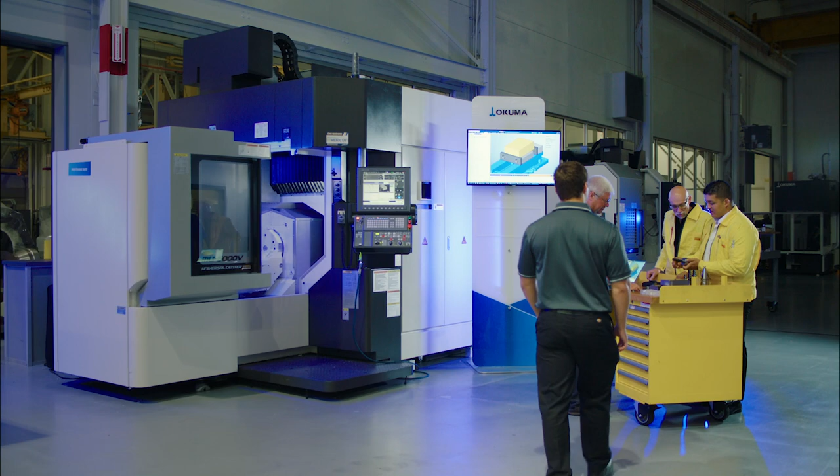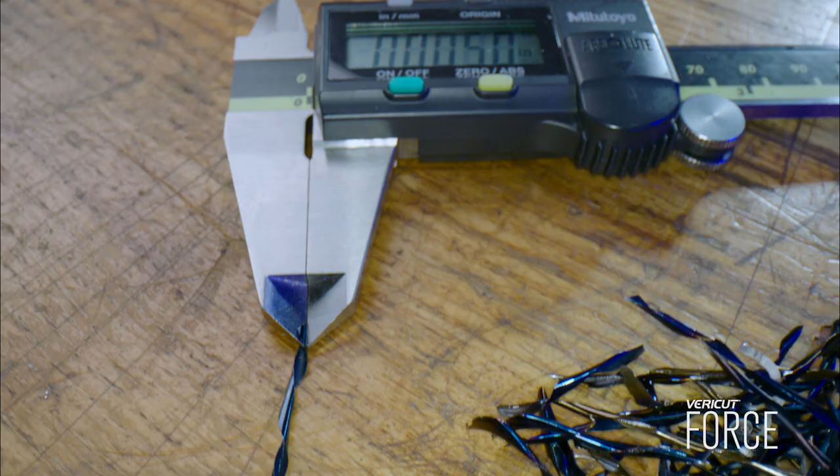Force optimization is based on machining fundamentals that have been proven since we started making parts. It changes program feed rates to keep the chip thickness as ideal and constant as possible. You get charts on chip thickness, the volume removal rates of the tools, tool deflection potential, cutting forces at the tool tip, and spindle power. All that information is available at your disposal, so you can take a look and see where your problems are.

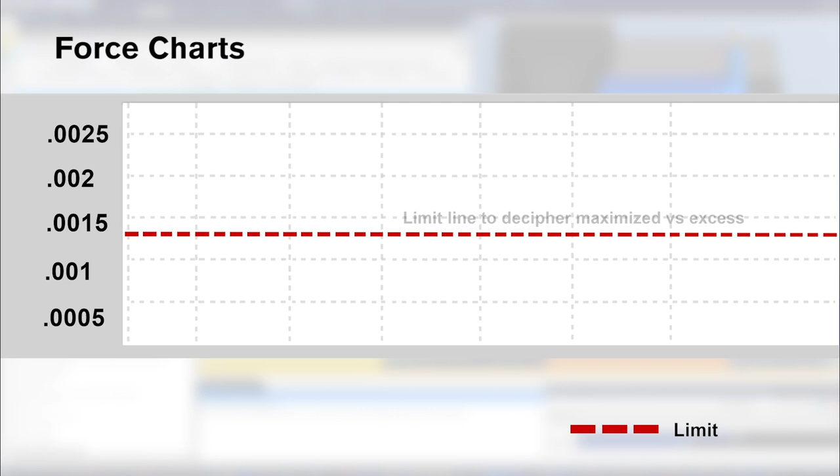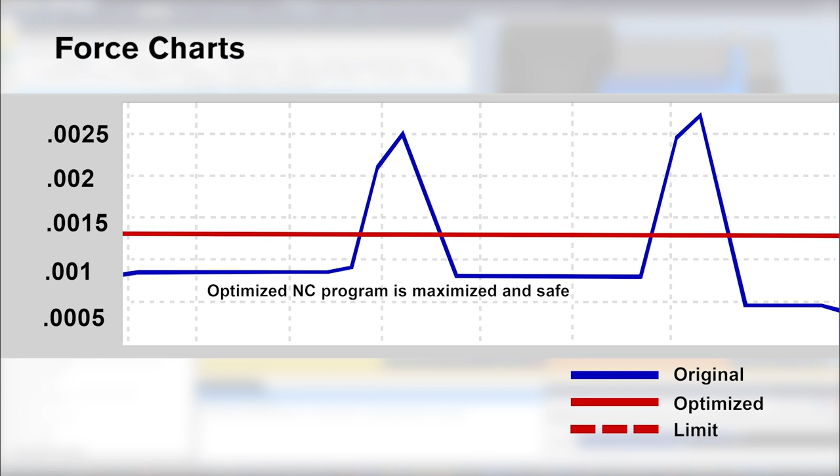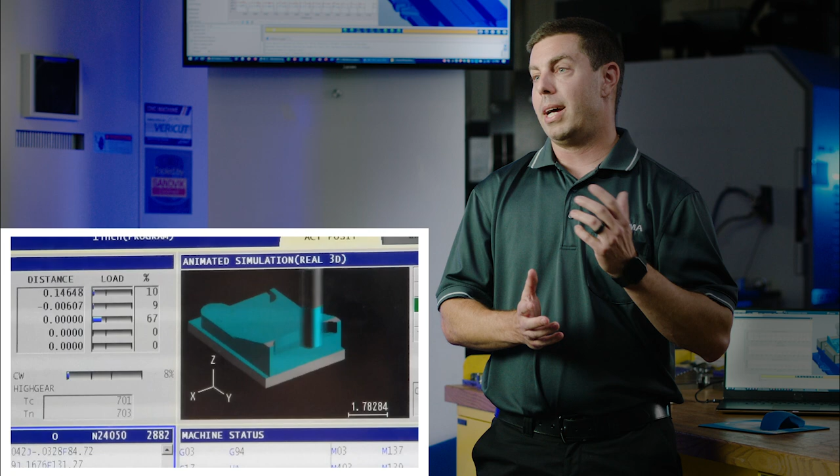It's going to give you the best surface finishes, minimize tool deflection, and do so in the least amount of time. Because Force is constantly altering the feed rate, the spindle has a more constant load on it, and you can actually hear the machine perform better.

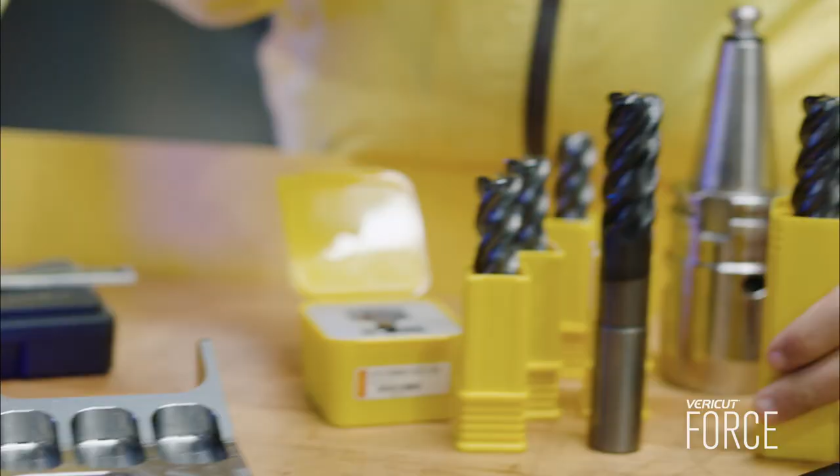Force optimization also benefits cutting tool life. It looks at each individual cutting tool and precisely matches its performance to how the cutting tool manufacturer designed it to be used, which means every tool performs to its absolute best potential.

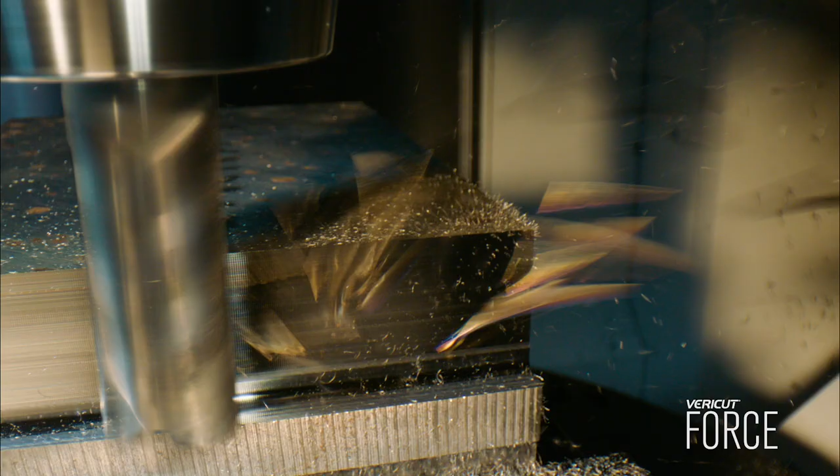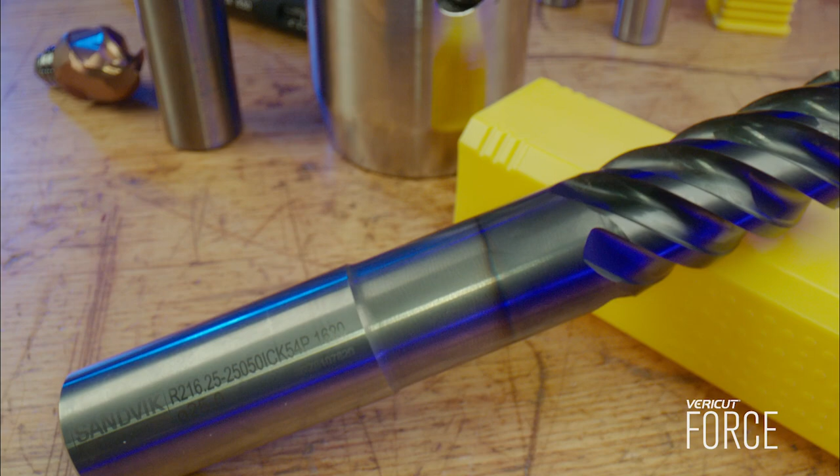Optimizing a process, both current and new, has really helped us not only from the tool manufacturing perspective to utilize our tools to their optimum capability, but also in returning that benefit to the customer by increasing their productivity output.

You typically are going to see anywhere from 20 to 70% reduction in machine time. If you think about it, you're going to get 2 parts for the price of 1 at that rate.

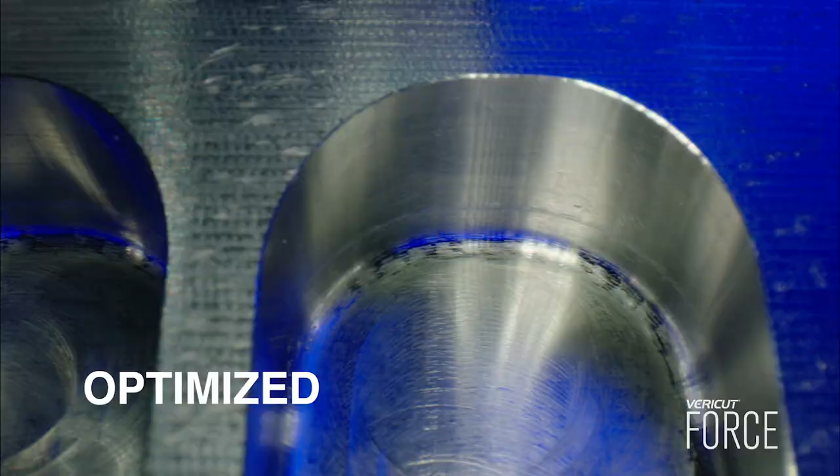Once it comes off the machine, the part goes to get deburred and cleaned up. But a Force optimized part is going to be much cleaner and in better shape than an unoptimized part would be. That means your whole throughput process gets faster and parts get out the door quicker. Everybody wants to benefit from that.

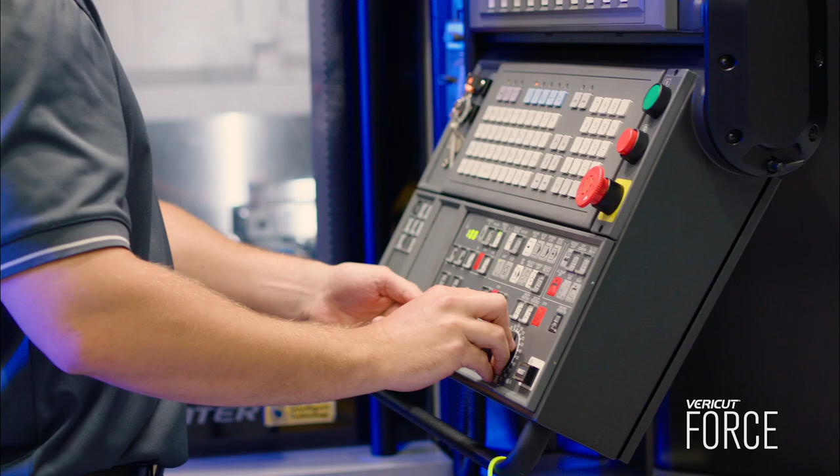VERICUT is a great security blanket. I've been using VERICUT for a lot of years. It gives you that peace of mind that when you go to the machine tool, your program is going to run the first time, every time, and you're not going to have any collisions. You can go into your process basically ready to hit the button and not have to worry about it.

Sandvik works closely with CGTech because we're both world-class organizations and we want to work with the best there is. VERICUT allows us to push the envelope, and we feel like CGTech is one of the industry leaders in verification technology, and now also in optimization technology with Force optimization.